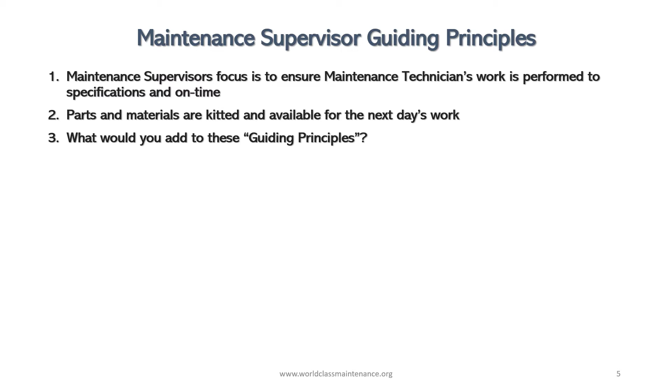So what does a day in the life of a proactive maintenance supervisor look like? Working with production on issues that maybe you have existing, not just today, but could be over the last week or month. Check on maintenance techs to see if they need anything. A lot of times maintenance technicians get so wrapped up in a problem that they really can't solve it. So sometimes just checking on, say, hey, is there anything you need?

Attend training. Some of the training that I recommend, what they call single point lessons or toolbox talks from maintenance technicians - I hosted one every week, and it came up with different topics that we were having issues with.

Recognize great work by employees. I mean, it's nothing like a handshake saying, hey, thank you, appreciate what you're doing.

Review equipment history with technicians. When you review equipment history with technicians, what it does is it pulls them into solving the problems that we have day to day. They know more about the equipment than anybody. Review issues in the plant. What kind of issues are we having in the plant? What do we do?

Then we look at human reliability. Human reliability is related to the field of human factors engineering. It refers to the reliability of humans in fields such as, in this case, maintenance or manufacturing. Human performance can be affected by many factors such as age, circadian rhythms, state of mind, physical health, attitude, and emotions, propensity for common mistakes, errors, and cognitive biases.

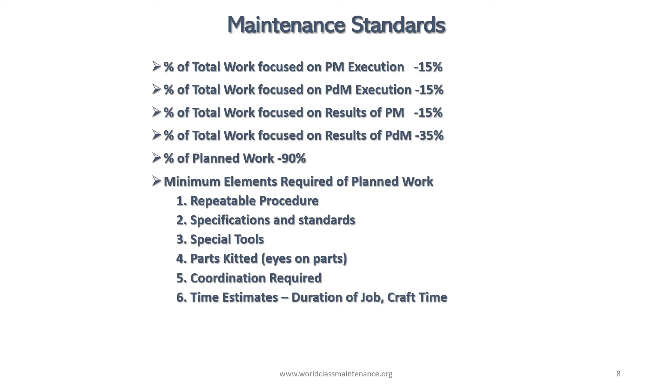The planner does it the week prior. The supervisor does it starting on the first of the week before shift begins. Coordination required: time estimates, duration of job, craft time. So what is some work management core beliefs?

Planners remain focused on future work. If you want to know if you've got a proactive planner, call them on the phone and say, hey, I need a part right now. If the next thing you hear is the dial tone, you've got a proactive planner. Planners do not chase parts for jobs in progress.

These things have to do with the maintenance supervisor. That's your role and responsibility. Maintenance supervisors and crew leads handle the current day's work and problems. Faced with a choice, a maintenance supervisor must concentrate on today's problems rather than work on the future, even tomorrow's activities. There's no such thing as a perfectly planned job.

Continuous improvement is a must for this planned job. That's why a repeatable procedure is critical. All stakeholders must share the same priorities. Active communication on priorities is an absolute requirement.

Let's talk about the philosophy of maintenance. Maintenance will be planned, scheduled, and managed. Cost as an investment versus a burden. Maintenance is an investment in the reliability and productivity of an organization.

Managed versus supervised. Empower everyone. We want everybody pulled in. Decisions made, actions are made at the lowest level. Maintenance supervisors focus on enabling high wrench time, or hands-on tool time.

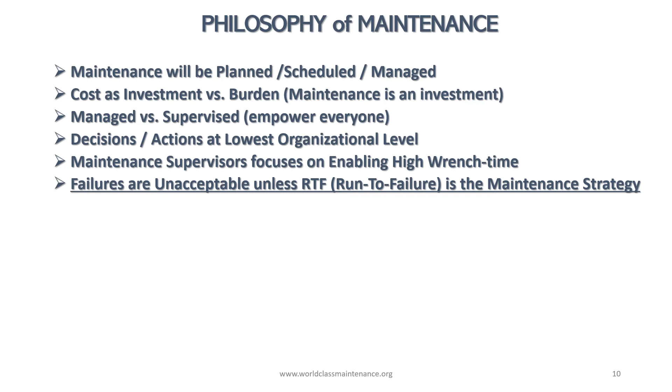Failures are unacceptable. This is the one I like. It's unacceptable unless run to failure is the maintenance strategy. And run to failure is a maintenance strategy, but at a lot of companies I visit, it's the dominant maintenance strategy they have. So, warning: only permanent repairs made here.

A few of the most common reasons a plant does not follow best maintenance repair practices: maintenance personnel not provided the time to perform the repair to specification. That's why we have to have it when we schedule the job, we have to know how long it's going to take. Now if it's a breakdown, that's different.

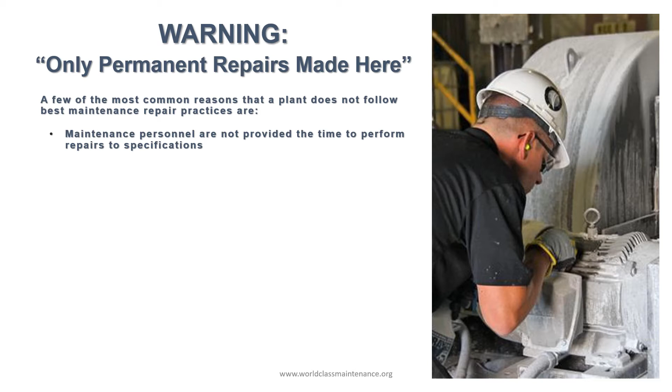So that's going to be who's going to put a barrier around the technicians when production keeps asking how long is it going to take. Well, it has to do with the maintenance supervisor. Keep them back, tell them what's going on. Keep them up front on what's happening so they feel comfortable that everything's going to be okay.

Maintenance planning and scheduling not effective or existing in a proactive state, that's a problem. Repeatable procedures not in place to ensure lessons learned from failures are used to optimize asset reliability. One of the things we used to do when I was a maintenance supervisor and later a maintenance manager, when we had persistent problems on an asset, we'd bring those procedures up along with equipment history, match it to our repeatable procedures, and see what is wrong. Is the procedure wrong, or is there something else going on?

Maintenance is reactive and does not follow the definition of maintenance, which is to protect, preserve, and prevent from failure or decline. You've got to react. Typically, if maintenance is reactive, the plant itself is totally reactive. Management's not supportive and/or does not understand the consequences of not following best practices. Real understanding must involve a knowledge of how much money is lost to the bottom line, and it is huge.

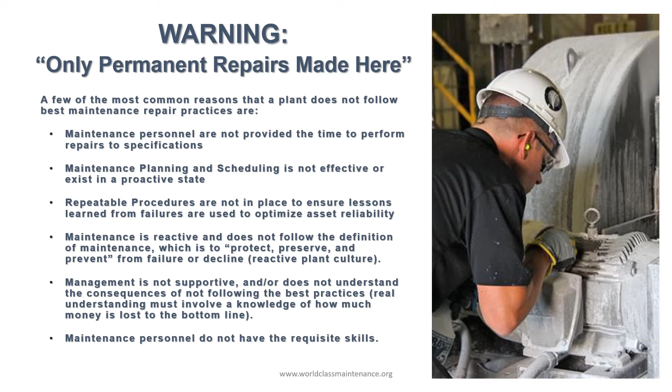Maintenance personnel do not have the requisite skills. This is a big problem. If we hire the wrong person, we can get stuck with them forever. We need to train them. The maintenance workforce lacks either the discipline or direction to follow best maintenance repair practices.

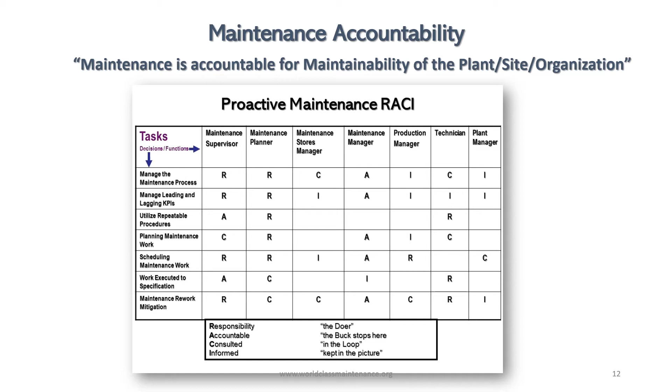So, maintenance accountability: maintenance is accountable for maintainability of the plant, site, organization. This is a RACI chart. RACI charts of roles and responsibilities make it simple so everyone understands how you work together, so someone can't say 'it's not my problem.'

Human-induced failures are 70 to 80% of failures. Causes: physical ability, competency, fatigue, stress, organizational, work pressure, long hours, insufficient supervision, plant and equipment, poor equipment condition. I mean, you can't maintain something that's not maintainable.

Storeroom, making parts work which is not what was required to maintain or restore. So we've got to use some other part, not the one that's going to help us get it going. I mean, to restore it, but we're going to patch it in that case.

Remedies to mitigate human-induced failure: proactive maintenance supervisors, effective maintenance planning and scheduling, repeatable procedures, agreement with production on work schedule for the following week's work, locked storeroom, no parts checked out without a work order which is charged to an asset, formal training first, weekly single point lessons I mentioned, and then discipline in maintenance work execution.

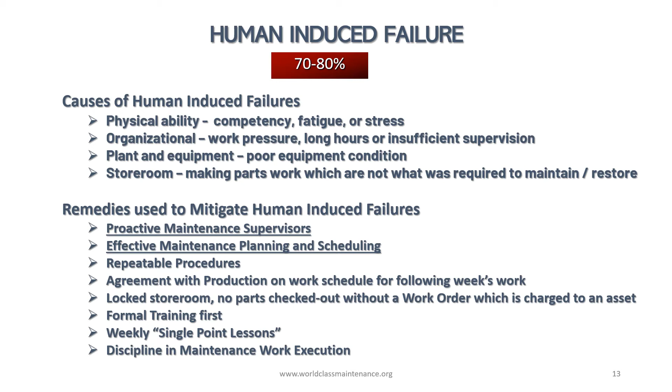That's why I like, on the procedure with my guys, they used to have to initial each step on the procedure. It doesn't take long to do. Okay, I finished that, I did it correctly, yes, initial. Very simple.

Proactive maintenance. We've got two types of maintenance: reactive and proactive. Proactive maintenance, the technical meaning of maintenance, involves functional checks, servicing, repairing, and replacing necessary devices, equipment, machinery, and supporting utilities - to keep in existing state, preserve from failure and decline. Keep, preserve, protect.

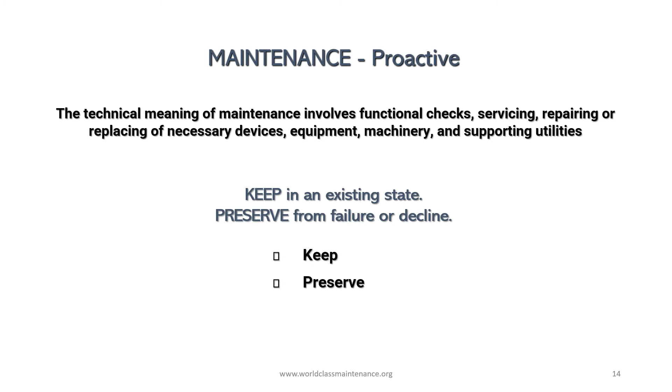So we look at the maintenance workflow to optimize asset reliability. A lot of our information first comes from defect abnormality, identified through operator care, preventive maintenance, work requests, and so on. Then we scope the job, plan the job, schedule it, technician picks up the parts from the kitted area, work is executed to specification, work order close out, and then it goes into the history where we can evolve to make this program even better.

Now let's look at world-class maintenance standards, or maintenance excellence. Maintenance spending as a percent of replacement asset value is 2 to 2.5% for world-class. What does that mean? If you look at the correlation between world-class and worst-in-class, your spending typically is going to be anywhere from 4 to 6%.

That means you're spending a lot of money to get the maintenance that you're getting - probably reactive. Budget compliance, plus or minus 5%. Overtime, straight time, 6 to 8%. I worked at this world-class plant.

The first plant in the world ever certified as world-class, at Alcoa Mount Holly. We had a lot of overtime when we first started up because it's a very large facility. We had a lot of issues with new equipment, new technology, but once it got to a certain point, we were making a lot of money. And to be honest with you, everybody was paid well, so we didn't want the overtime. We really didn't want it.

This was a big deal because he had this up where his technicians could see how well their work was performing. So what is wrench time and how does it impact maintenance? Wrench time is hands-on tool time. Typically, wrench time is 5 to 15%, world-class is 55 to 65%. The wrench time is hands-on tools - not traveling, looking for parts, and finding Jimmy and finding tools and so on.

Maintenance cost of replacement asset value is optimized. Worst in class 6 to 9%, world class 1.7 to 3.4%. So I'm going to give you a wrench time example, okay?

So how does a typical maintenance day get spent? Direct labor hours: I've got 10 technicians times 40 hours, that's 400 labor hours. Indirect time - first is traveling. Out of these technicians, 67 hours are spent traveling from point A to B or C to D or wherever. Looking for parts, 32 hours.

Looking for tools, 28 hours. Looking for information - who's got the information? Jimmy's got the information. But where's Jimmy? I think he's on the other side of the plant. Waiting on production, 79%. Looking for maintenance leadership, 22%. Traveling to and from job site, 67%.

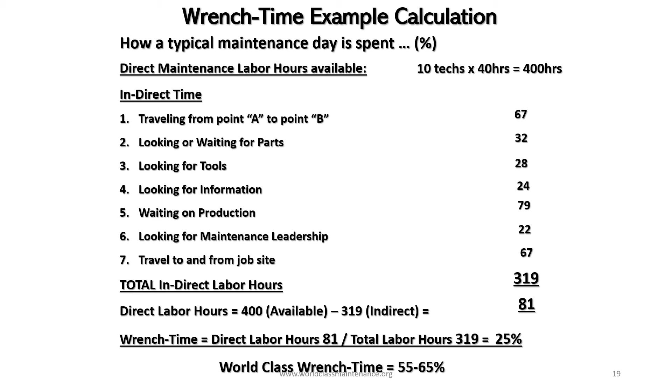So the indirect labor hours total 319. Direct labor hours is 400 - that's 10 techs times 40 hours. 319 indirect means we actually have 81 hours of direct labor. So our wrench time in this case, if we look at it, is 25% - direct labor hours 81 divided by total labor hours 319 is 25%. World-class wrench time is 55 to 65%.

Let's talk about maintenance planned work. This is work that's gone through a formal planning process to identify labor, materials, tools, safety requirements. This information is assembled into a job plan package and communicated to the craft workers by the maintenance supervisor prior to the start of work.

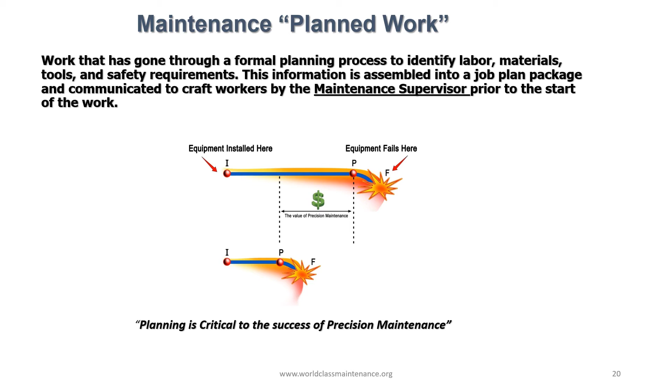Planning is critical to success of precision maintenance, doing things the right way at the right time. Maintenance scheduling is the when and involves assigning all required resources to perform the work at the optimal time to facilitate the most efficient execution of work.

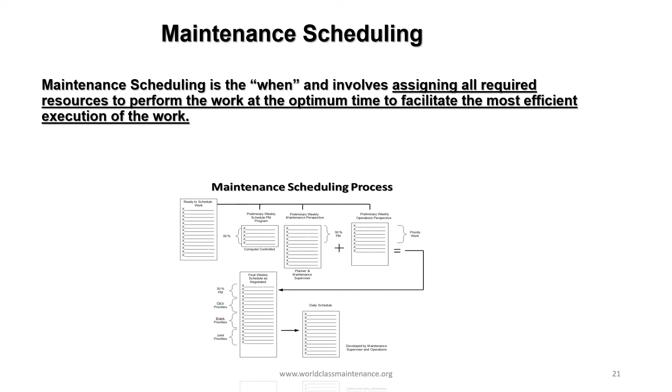So maintenance planners and maintenance supervisors should be trained in maintenance planning and scheduling. Absolutely, it should go through the same training. Maintenance planners and maintenance supervisors make the most impact on increasing wrench time and thus need the same knowledge in planning and scheduling. This is one team.

Now, defining roles and responsibilities using RACI. The R is responsible, can be multiple people. The A is accountable, the buck stops here, can only be one person for the task. So that's who we go to if we got a problem. The C is consulted, two-way communication. The I is informed, one-way communication, no reply expected nor accepted.

So what is RACI? RACI is a process which aligns all stakeholders focused on a specific process. RACI's objective is to ensure everyone knows their contribution to a specific process. No one can say, that's not my job, or I didn't know I was responsible.

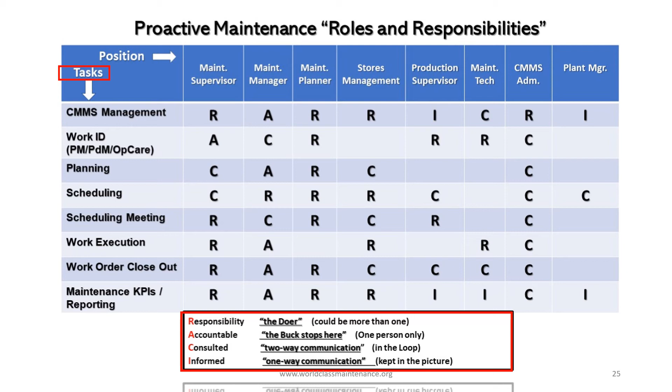Now, maintenance supervisors focus on human-induced failures. I mentioned that. So here's the maintenance task: the standard for the task, required best practices, consequences of not following best practices, and the probability of failures.

So we got lubricate bearing. The standard is lubricate interval time-based plus or minus 10% variance. Required best practices: clean fittings, clean the end of the grease gun. Why do you do that? To make sure you don't get contamination into the bearing. All it takes is one grain of sand or dirt or silicon, whatever you want to call it, gets into that bearing and it's going to start failing immediately.

Lubricate the proper amount and right type of lubricant. Lubricate within the variance of frequency. So what is the consequence of not following best practice? Early bearing failure, reduced life by 20 to 80%. Probability of future failures, 100%.

And then we got V-belts. Measure the tension of V-belts through tension and deflection, utilizing the belt tension gauge. Identify the proper tension and deflection for the belt for required best practices. Set tension to specification. Consequences: premature belt failures through rapid belt wear or total belt failure, premature bearing failure of driven or driver unit. What's the probability? 100%, 20 versus 1.

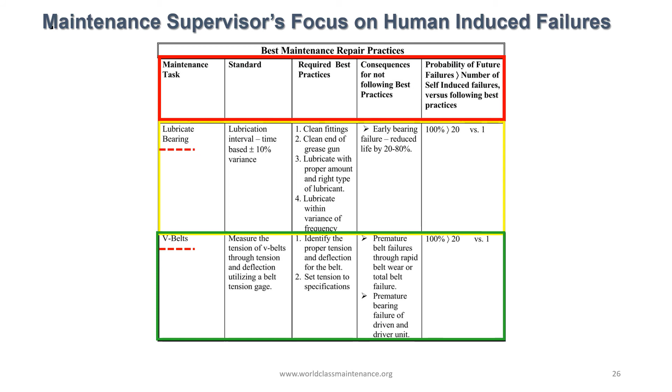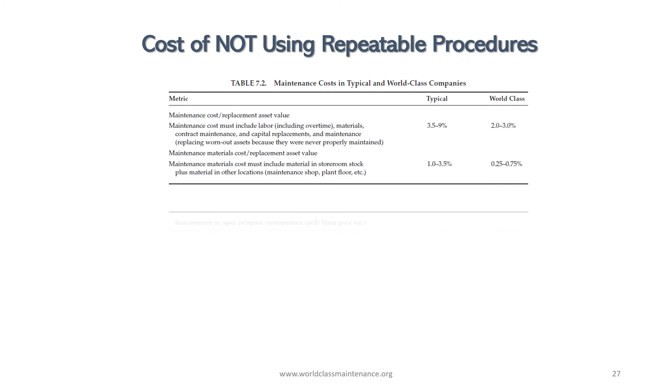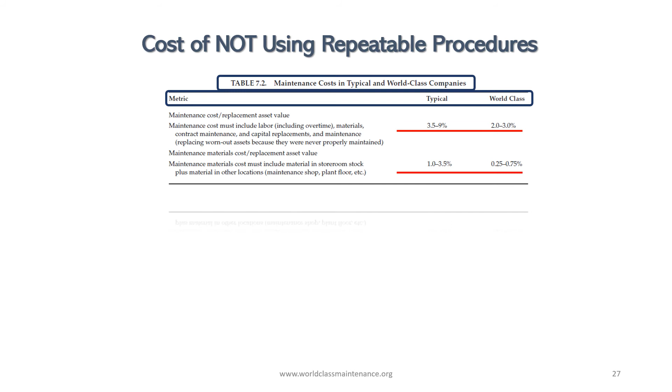So let's talk about repeatable procedures. What's the cost of not having repeatable procedures? These are the procedures you can give to any technician and they'll do the work the same way. So what's the cost of it? If you look at the maintenance cost, I mentioned this before, the replacement asset value, I could tell you companies that don't have repeatable procedures, their maintenance cost is out of control.

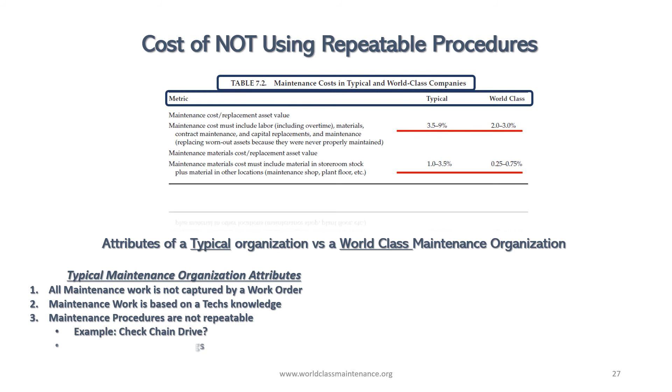So attributes of a typical organization versus a world-class maintenance organization. Typical attributes: all maintenance work is not captured by a work order, maintenance work is based on the technician's knowledge, maintenance procedures are not repeatable. Example: check chain drive, lubricate bearing, that's all it says. So maintenance rework is high. Rework is corrective work done on previously maintained equipment that has prematurely failed due to maintenance or material problems. The typical causes of rework are maintenance, operational, or material quality issues.

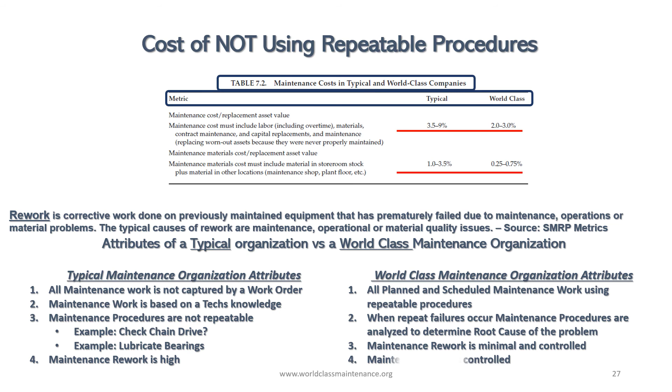World-class maintenance attributes: all planned, scheduled maintenance work using repeatable procedures. When repeat failures occur, maintenance procedures are analyzed to determine the root cause of the problem. Maintenance rework is minimal and controlled. Maintenance cost is controlled. Now we talk about repeatable procedures, the requirements for writing procedures to ensure repeatability.

We got to define best practice, because once we define the best practice, all the work we have, we'll see again. We want consistency and continuity, no matter what technician I give it to, they can do it to specification. It reinforces best practice, so if new information presents itself, you don't have to worry what best practice is, it's going to be on that procedure.

Define training and certification. You got new technicians coming to work. You're given the procedure with one of the good techs, and all they do is observe them, saying, okay, follow the procedure.

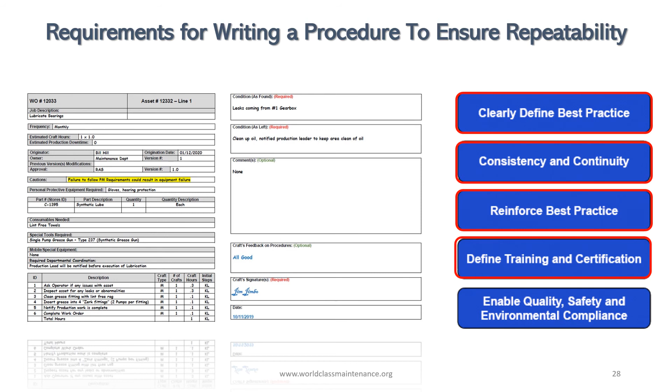It enables quality, safety, and environmental compliance. There's no doubt about it.

So what are the steps to write or rewrite PM and corrective maintenance procedures? First, you assemble a cross-functional team. You want to have people that have different ways of looking at it.

Step two, provide PMs or corrective maintenance on the first asset, preferably one with the most problems. Review the work order history for the past 30, 60, 90 days. Provide a procedure template for rewriting this corrective or PM procedure, and then rewrite the corrective maintenance PM based on specific criteria.

The most you want to have, the minimum you need to have, on each step of that procedure would be a noun, adjective, and a verb. You don't need long, lengthy sentences. If you do, people don't read it.

Then measure the effectiveness of the procedure. Typically, you're going to measure it by rework.

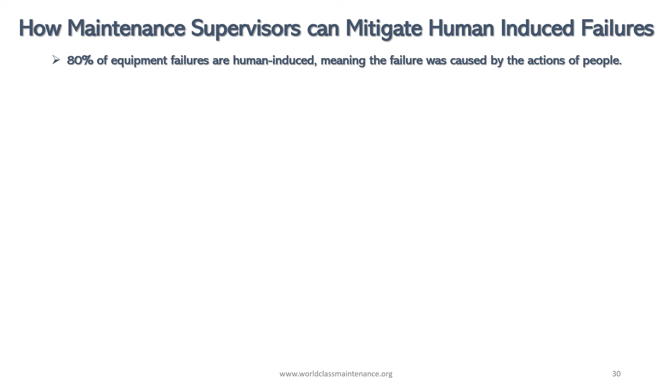So how can maintenance supervisors mitigate human-induced failures? Especially when 80% of equipment failures are human induced, meaning the failures are caused by actions of people. It's by paying attention, by focusing on, by making sure they're following their procedures. Focus on those procedures, making sure they're following them.

Examples of human-induced failures: repairs are not made with repeatable procedures, so everyone does it a little or a lot differently, creating an uncontrolled deviation to the reliability of the equipment.

Mechanic 1 is an example: lubricates an asset, follows a repeatable procedure, does the job the right way, resulting in mean time between failure far exceeding expectation.

Mechanic 2 lubricates the same equipment without a procedure, just does it like he always has. Not knowing the proper contamination control method, MTBF is out of control, but no one knows it because it's not measured.

Maintenance supervisors can mitigate human-induced failures through inspecting the work technicians are performing and asking questions such as, hey, how are things going? Any problems with the repair or the work you're doing? Do you need any extra help?

Interesting: maintenance supervisors and technicians interaction. One-on-one interaction between supervisors and technicians is critical to success. Respect is critical between supervisor and technicians, must be displayed on both sides. Maintenance supervisors should never ask a technician to execute any task that is not understood by both parties.

So attributes of a proactive maintenance technician: ensures all work is executed to specifications, performs preventive maintenance as a controlled experiment. In other words, you put the equipment in a controlled state and do certain things to get a certain outcome.

They always seek to advance their technical knowledge through on-site, off-site, and vendor training. If a patch is required on a rush or emergency job, they always write a corrective maintenance work order so the equipment can be restored to specification at a later date.

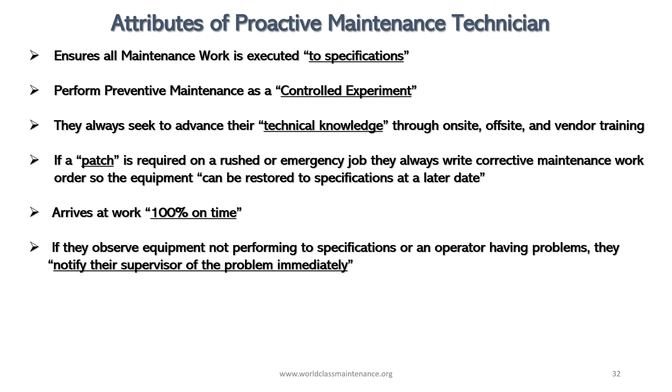Arrives at work 100% on time. If they observe equipment not performing to specification or an operator having a problem, they notify their supervisor immediately of the problem.

So what is motivation? Motivation is a reason for actions, willingness, and goals. Motivation is derived from the word motive, or the need that requires satisfaction.

These needs, wants, or desires may be acquired through influence of culture, society, lifestyle, or may be generally innate to you because maybe you learn it from your family, from your parents.

Maintenance supervisors are critical to motivating maintenance technicians. Without a good maintenance supervisor, your technicians aren't going to be happy. They're not going to be motivated.

So some proven motivation concepts: provide people a great place to work, offer opportunities for self-development, foster collaboration with the team, no 'I' in the word team, encourage happiness, don't punish failure, select clear goals, never show anger or discouragement to your subordinate.

Now, I have to tell you, as a former maintenance supervisor, sometimes I got a little stressed because of an action one of my technicians did. So I'd have to walk around outside the plant and come back. At the time it was a pager. I'd leave my pager on my desk and walk around the plant. By the time I came back, I was cooled down. I didn't feel like I had to get excited about it.

Never ask someone to do something you wouldn't do yourself. Set the example. Give people their score. We want to have a scorecard that people can see how well they're doing.